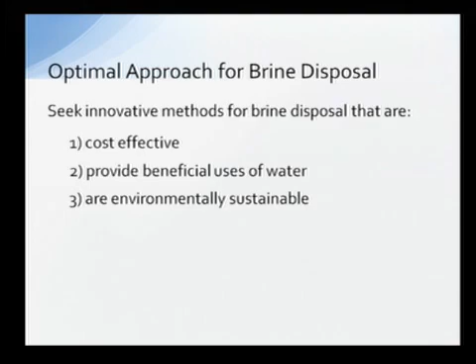So if I were to give a mission statement of brine disposal, if there would be one, we'd look for the optimal approach for disposal. We'd seek innovative methods for this that would be, number 1, cost effective, number 2, provide beneficial uses of water, and 3, environmentally sustainable. So keep that in mind as we go through this presentation. We're trying to achieve these factors.

Here's an aerial shot of the Bullard Water Campus. The current paradigm at the Bullard Water Campus is currently treating about 3.5 million gallons per day of groundwater pumped from the aquifer. The water campus uses reverse osmosis to treat pumped groundwater and produces 0.5 million gallons per day of concentrate, or I'll refer to it as brine. The brine contains high quantities of salts, metals, and nutrients. The brine is currently sent to the 157th Avenue Water Reclamation Facility for blending, where it accounts for about 12% of the capacity of that plant, but accounts for 40% of the salt loading of that facility.

Can I ask a question? Yes, Sherry? Can you explain that to me in English? What does that mean? That last paragraph, what does that mean to a layperson if I'm listening to this?

If you're referring to the capacity, currently we're blending, we're taking the brine and sending it through the sewer collection system to the reclamation plant where we treat our wastewater. So there's a volume of that water going to the plant, and it's consuming volume at that plant. So what we're going to talk about, jumping ahead a bit, is can we get the brine out of the plant. That could free up capacity at the plant, which would treat basically wastewater and not have brine come in there. The 40% salt loading: the RO facility is taking groundwater, and after it goes through the RO process, you're left with this brackish, salt-filled brine solution at a real high concentration. So it's accounting for the salt loading. What's coming in the natural wastewater stream to the reclamation plant has a certain matrix and makeup, and we're loading that real heavy right now with that brine concentration. So removing this from the plant would get the plant back into a more normal operating configuration, and also free up capacity. That's a goal we'll talk about in the presentation. Does that answer your question? Yeah, that helps. Thanks. You bet. Thank you.

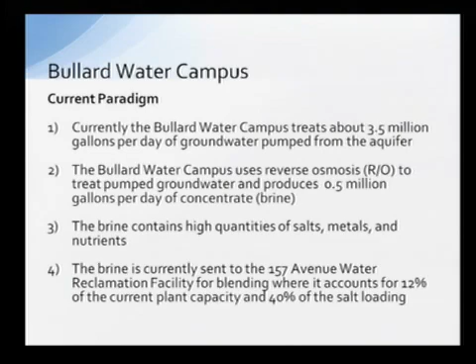So I want to touch on one other thing. The city will be producing brine from the Bullard Water Campus, even though someday we will be taking CAP water directly to the city.

The reason for that is we're still going to have peak summer demands. We're still going to need to pump groundwater and help with peak summer demands as the city continues to grow. In the wintertime, we're going to need to exercise those wells, make sure they're operating correctly in our lowest demand seasonal time of the year. So we're going to exercise those systems.

And of course, the largest component of our portfolio is CAP water. And of course, we're going to potentially have shortages on the Colorado River that could potentially impact us ordering CAP water. So when that occurs, we're going to talk about later on in a Vadose Zone presentation how we can firm those shortages. But that would come through recovery of our long-term storage credits through these wells.

Joe? Mark, I was reading somewhere in a paper on the CAP where they're looking at some potential shortages coming up. How's that going to impact us?

Well, I think we're going to be in a good place. Right now, the CAP has a mixture of priorities within what they're delivering to the CAP canal. The lowest priority water is excess CAP water. There still is a little bit of excess CAP water currently not yet used by subcontractors because they haven't grown into that volume they have acquired.

Next on the lowest priority is agricultural priority water. These account for about somewhere between 500 and 600,000 acre feet per year. And then at the highest priority water is municipal and industrial and, of course, Indian community water.

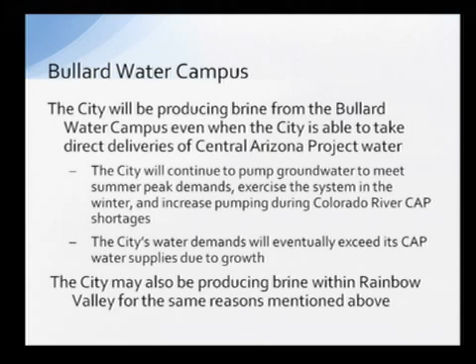Are you talking about our water that we've ordered, that we're on the list for? I mean, we get some of that water that's recharged, correct? We currently order CAP water and have the CAP recharge it for us. What I'm reading is that they could potentially have a shortage, and I'm wondering how that's going to impact what our availability is and what we're guaranteed to buy. What he's saying is, of that water, what are we guaranteed before they start cutting back on it?

Normally, we're going to get an advance warning by the Secretary of Interior. For example, right now we're ordering water before October 1st for 2014. Right now, they're speculating 2016 might be a shortage. We're going to get that firmed up probably around 2015 before we do the order, and we'll know the impacts then. I suspect that we won't have an impact with municipal industrial ordering, but if we would, it means that we would be able to order less water than we currently could out of our portfolio to make that shortfall. We'd have to rely on our long-term storage credits to meet the replenishment obligation of what we're pumping.

Okay, thank you. You bet.

And of course, you probably have heard some of the southern solution aspects. It's hoped that we could take what's learned from this study and extend it down to the south for the southern solution, which we anticipate could be generating brine as well if there's an RO facility due to the high TDS concentrations, the total dissolved solids, including salts and other components in the Rainbow Valley area.

So the Bullard Water Campus Pilot Wetland Project, I just want to show you a couple images here. The upper left-hand corner was when the pilot project first came online. You see in the lower left and upper right, it's reaching full maturity. And then the lower right, another shot there.

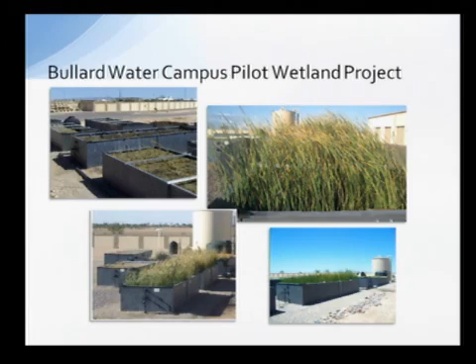So it was a small-scale pilot to see if it worked, to take brine and create a brackish wetland, to see if you could remove specific components from the brine and make the water better quality. We'll touch on that.

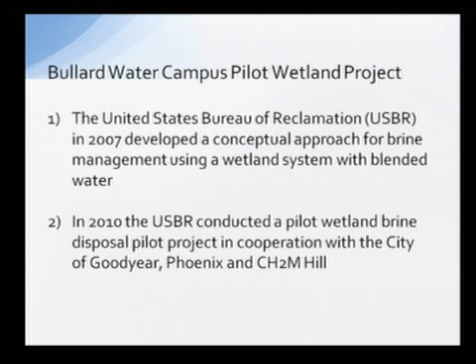In 2007 the United States Bureau of Reclamation developed this concept approach for management of brine using an engineered wetland system for blending water. And in 2010, the Bureau conducted a pilot wetland brine disposal pilot project in cooperation with the City of Goodyear, the City of Phoenix, and CH2M Hill as their engineering firm.

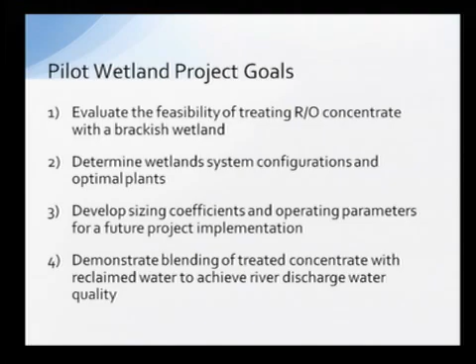The main goals of the wetland pilot study were to evaluate the feasibility of treating RO concentrate with brackish wetland, determine wetland system configuration and optimal plants that would consume as much of the brine components as possible, and also look at developing sizing coefficients and operating parameters for future project implementation at a much larger scale. And then demonstrate blending of treated concentrate with reclaimed water to achieve river discharge, meeting certain water quality parameters. That was actually not completed due to some funding, but we'll talk about a little bit of the blending opportunities that we'll have.

The conclusions of the pilot wetland were as follows. The wetland system was capable of effective treatment of RO brine and removal of metals and nutrients. The plants thrived in the brine, so that was very successful, and the plants grew. They did what they were supposed to do, removing the various components from the brine.

This generated a lot of interest from the Environmental Protection Agency and the Arizona Department of Environmental Quality. They've definitely been part of the stakeholder process—how would they permit these facilities, how effective would they be, and what type of monitoring activities would ensure that any discharges into rivers or waters of the U.S. would meet permitting requirements. So they're very interested in this and seeing the success of this move forward.

Joe? Wetlands, will this generate wildlife? There's a possibility that wildlife could find homes or habitats within these parameters, absolutely.

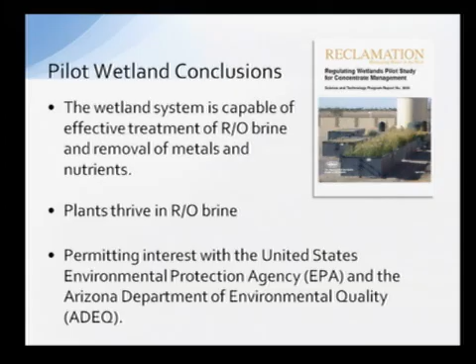My second question is I'm not really sure exactly where that's going to be built. Any problem with the airports? Absolutely—if there are certain requirements, certain buffers around the airport, such as FAA restrictions on open bodies of water and waterfowl and so forth, we'll have to account for that in the feasibility study. We'll take that into consideration. It may not be the most suitable site. There are other potential sites that may be even more suitable just for that very reason, avoiding FAA restrictions. Okay, that's a great question.

Thank you. The birds want some salty grass, that's where they'll be going, right?

They like... So the proposed new feasibility study goals are as follows: to identify potential sites or a site for a demonstration scale brine wetland project.

And of course, ultimately identify the best site. There may be more than one site—it could be a chain of sites. Develop a preliminary design based on that site. Develop a detailed cost estimate. And define the permitting and environmental parameters and requirements. At the end of the day, we want to produce a report that outlines all of these feasibility components.

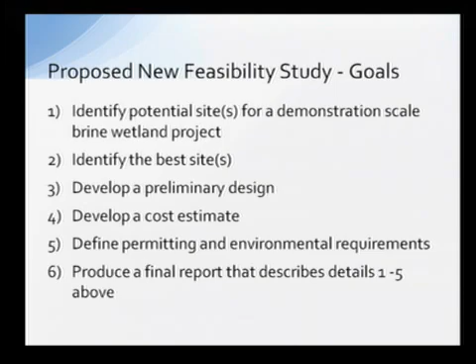So at the end of the day, the goal of this feasibility study is to have a detailed report that we can use as a tool to take the next step, potentially.

I just want to touch on the benefits outlined here to the city. The United States Bureau of Reclamation is a partner. They are contributing $300,000 of in-kind and in-cash, along with their expertise and talents towards this project, and they have quite a team behind them.

Ultimately, and what I think we're all hoping for—I've talked with several folks at the Bureau—the goal of this, if successful, is to solicit funding from the federal government, to seek additional funding from the feds and try to work towards actually constructing this implementation project.

I know it's a lot of information on this slide, but I think it's really worthy of an approach that we're trying to take, going back to that, if you were to have a mission statement, the benefits I see with the city.

In 2010, the Central Arizona Salinity Study Report, referred to as the CASS study, have been doing work on salt in the Phoenix Valley for well over 10 years. They looked at strategic alternatives for brine disposal in the Valley of the Sun, and they identified various types of brine disposal methods and the costs.

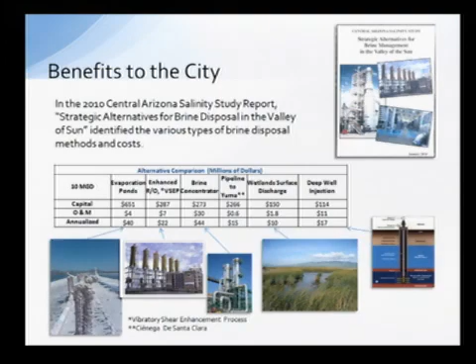So we're trying to look at this as a viable potential solution. It has been identified as the lowest cost annualized. So we're going to look at that as an approach. I included some pictures there. I think the worst is the evaporation ponds. That looks pretty bad. At least it looks natural.

Additional benefits to the city: the city is getting a more comprehensive brine feasibility study than was originally planned in the CIP. The original CIP plan talked about a brine disposal method using deep well injection. So not only would you, and there was a certain dollar amount which we'll touch on a little bit later,

but it looked at a feasibility process that's currently not allowed by state law. So even if it was something to explore, it's still against state law. We'd have to approach statutory changes.

And I'm having discussions with the Department of Environmental Quality. They're very concerned about this because the deep well injection will go into aquifers that they believe someday may be future water supplies. Are we creating an unintended consequence for the future of a future water supply that we may have to embark on using? So they're concerned about that.

The findings from the study may provide real solutions towards brine disposal for the Bullard Water Campus, as we touched on. Again, if successful, it could provide some solutions for that. We've been talking about the Rainbow Valley issues and brine disposal that may occur there as well.

If constructed, these wetlands could promote environmental sustainability. There could be wildlife enhancements. They could sustain or enhance riparian areas. We have a few of those within the city.

The Bullard Wash is one. I think that's being even considered in the parks master planning. They could provide new recreational and educational amenities or enhance current planned recreational or existing areas.

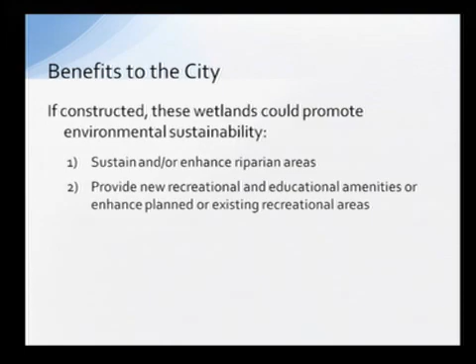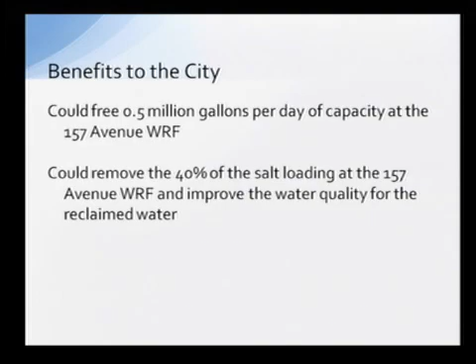And we already touched on this earlier. It could free 0.5 million gallons of capacity at the reclamation facility and remove 40% of the salt loading at the plant. That would actually improve the effluent water quality substantially.

And again, real quickly, U.S. Bureau brings $300,000 in kind and cash. The City of Goodyear would have a 50% match requirement with this feasibility study, which would be money in kind and cash. We propose, in fiscal year 13, the original brine disposal for deep well injection.

So we'll be coming to you tonight in the regular council meeting to talk about reallocation of that funds for this feasibility study. And then the remainder in fiscal year 14-15, as the 168,430, would be an in-kind match.

And we've shared the in-kind cost schedule with the various department heads who would be involved, which is Parks and Rec, engineering, development services, and a few others, and GIS. They are very comfortable with us meeting our in-kind match.

As I just mentioned, tonight's regular council meeting will request to approve a resolution that would approve the city manager to sign, approve, or designate approval of all agreements for this feasibility study. And we request a reallocation of the funds from the original brine feasibility toward this project. With that, I'll happily address any questions.

And I was right on time, 20 minutes. Thank you. Questions? Bill? Mark, are there any other communities that are using—

Sorry, let me go on to Wally for a minute. Take a drink, Bill. And Wally, go ahead, ask your question.

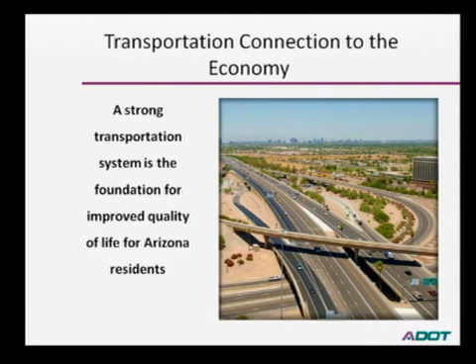Now with the funding situation you're well aware of, we're unfortunately making a shift, and we're going towards more of that 76% in preservation and 23% in expansion. But as you well know, we've seen what we can accomplish when we have funds to build, and what happens to our communities in the good times. So we want to make sure we balance that a little bit.

So we're looking at what we need to do to gear up for the future. You've all heard of I-11, Interstate 11 coming through, and that really is a trade corridor. The current study limits right now are between Las Vegas and Phoenix, but spread into southern Arizona—so we're looking at connections to the four ports along the southern Arizona border.

Right now there are two things I want to point out on that study—two pieces of information on the website, i11study.com. One is a justification report that zeroes in on: do we need this? If we're going to spend significant dollars on this corridor, do we really need it? And obviously we do.

The second is we're going to be working with the Arizona Commerce Authority on a business case analysis. Much like when you entertain a development agreement and ask your developer to provide an impact analysis on the project—is it going to make money if you invest in it?—we're going to do the same for I-11, providing a business case analysis. So when we look to private investors in the future, we'll show them that if you invest in this, there's an opportunity to get a return on your investment. Secondly, there's a passenger rail corridor study connecting the two major cities in Arizona, Phoenix and Tucson.

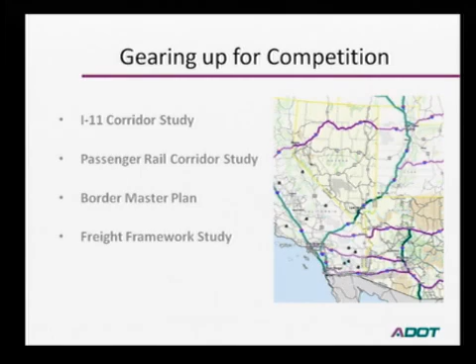We have our system, Service Arizona, that we get our license and things like that from. Well, the same thing - truckers can get their permits online, and if they get their permit and everything's good to go, they just roll right on through. So that's also helped with the wait times.

What we're looking at, again, is making sure that we're capitalizing on the region's assets. We've got a lot of great things in Arizona. We're positioned in between two giants.

There's a lot of money flowing east-west, between California and Texas, and we're poised right in the middle to capture that. Instead of it continuing to go through our state, we're poised to capture it and really position Arizona as the Southwest regional hub. So these are the things that we're working on, that we're looking for your support on.

The Transportation and Trade Corridor Alliance, I'm hoping that you've heard of that. It was commissioned, started by the governor last year, and it's a 25-member steering committee put together by the governor, co-chaired by Director Halikowski of ADOT, Sandra Watson of Commerce Authority, and Arizona-Mexico Commission Director Margie Emmermann. The three state directors, along with former Congressman Jim Kolbe, chair that committee.

They've brought in approximately 25 members from the business community - BNSF, all in the logistics area, BNSF, APL, which is the second largest shipping company in the world, Phoenix Sky Harbor, MAG, PAG are at the table, UPS - basically all of the heavy users out there to help us identify what infrastructure needs are needed to improve the business climate in Arizona and where we need to go in the future.

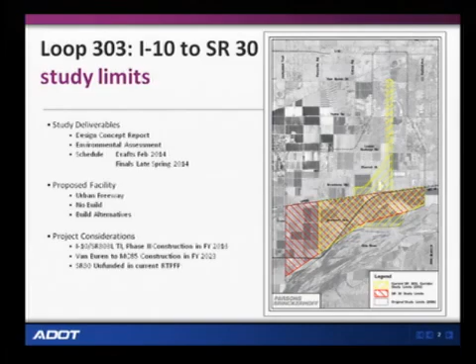All right, so now we'll get into a little bit of the outreach, as Tom went over the schedule. As you know, the study was placed on hold in 2009, and this past year it was reinitiated. Coming up, this fall and winter we'll start doing the outreach. This council update is part of that.

Then we'll get started with public involvement, and one piece of that is sending out a mailer letting all the stakeholders know that the study has been reinitiated, so we're not just jumping into a hearing without them getting any other information.

And then we'll be doing some business outreach, including business forums and business walks. We'll be getting hold of the right contacts, since there are a lot of corporate businesses down here, so that information reaches people who can actually make decisions for that business, not just the staff working there.

We'll also be meeting— I'm going to interrupt you just a moment. Can we publish some of these schedules in Focus?

Absolutely. That's a good idea, since Focus reaches so many people who might not always be looking at the paper, or who throw the postcard away. And Mayor, as the schedule gets more detailed, we can work closely with ADOT to make sure we use all our communication sources as well. Great, thank you.

And then we'll also reach out to Mr. Paxton to make sure we're covering all the businesses he wants, as well as the Southwest Valley Chamber. So we'll be doing a lot of outreach there.

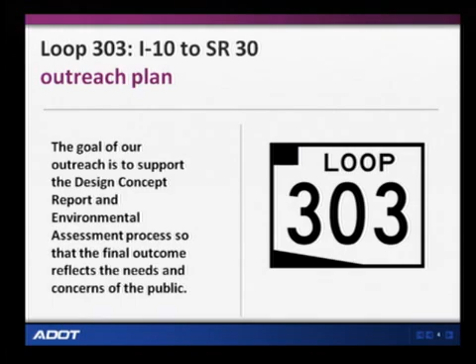So the goal of our outreach is to support the process and make sure the public voice is heard and considered as we reach our final decisions.

So here's a bit more of the plan. We will be doing two mailers, one coming out hopefully end of this month or early October to let people know the study is initiated, and one to announce the hearing as that gets closer. We've already started reaching out to the HOAs to find out when their meetings are.

So that we can let people know how to participate. We can't necessarily go out and present the information that will be at the hearing, but we can tell them how their voice can be heard. Same thing with community events—we'll host a table, if allowed, somewhere in front of the library or other community sectors, to make sure that information is out there.

We will offer two business forums, and we'll also meet with any businesses upon request. If the city wants someone there, we're happy to include that person. We'll have the public hearing next spring, anticipating March. Any questions? No questions?

Thank you so much for having us. I know that even though the public says they're not being informed, I have seen the cards, the advertisements in the paper, and through a lot of media. It's just that some people nowadays are so busy they miss it. If we can figure out how to catch the misses, maybe they'll look at our magazine. But thank you very much.

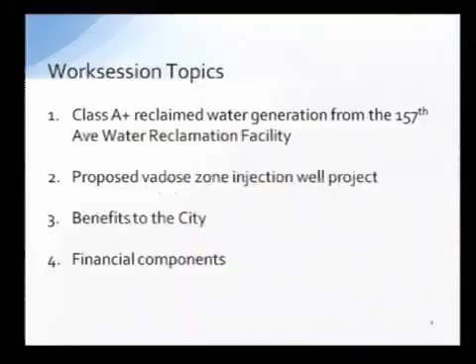There's a shot there of the 157th Avenue Water Reclamation Facility. It currently is delivering 8,700 acre feet of potable water through our entire water distribution system.

And of that, you probably recall from the work session, could you just tell the public how many gallons that is? One acre foot is 325,851 gallons. Thank you, it's a lot of water.

If you recall from the work session last October, approximately 40% of that is collected, what's used in the home or business or commercial enterprise, collected through the sewer collection system, and makes its way to the 157th Avenue Reclamation Facility, then is treated and turned into Class A plus effluent or reclaimed water. Currently today we are generating 3,500 acre feet at the plant, and it has, just to be specific, a current water value of about $600,000.

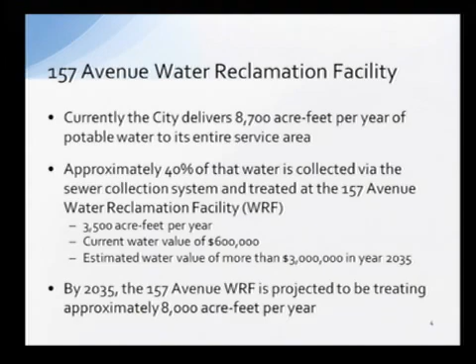Reclaimed water has a parallel track with the value of CAP, Central Arizona Project water, in terms of what it would take to replenish the aquifer if we chose to purchase CAP water versus using reclaimed water that we pump on an annual basis. By the year 2035, it's projected the reclamation plant will be producing a little bit more than 8,000 acre feet per year of reclaimed water. That's based on a trend model.

I want to touch on 3 generalized water reuse methods, the diversity between these 3 methods, and then we'll jump into the specifics of the vadose zone. First is direct deliveries and reuse - this is the famous purple pipe, and I'll be coming back in the near future to talk more about purple pipe within the city.

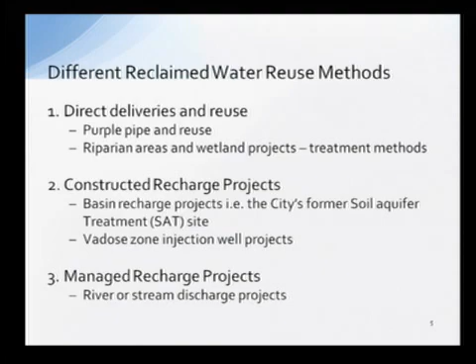The next is constructed recharge projects, similar to what you're familiar with from the city's former SAT site - this would also be classified as the vadose zone underneath a constructed recharge project. Last is a managed recharge project, where you take your reclaimed water and discharge it into a river or wash system, providing whatever beneficial reuse to that river or wash system, but it goes down to someone else - we're going to stop that eventually. I'm going to touch on all 3 of these in more specifics here.

Direct deliveries and reuse: the reclaimed water is directly delivered to the end user. A secondary reclaimed water infrastructure is needed, this is the purple pipe. It needs transmission mains, a delivery distribution system, and storage facilities, so it comes with those expenses. But it provides a single reuse only to those end users, and traditionally it goes to a water-intensive turf facility such as a ball field, and we're currently delivering reclaimed water to the ball fields. It provides 0% reclaimed long-term storage credits. Recall from the last work session, we talked about our long-term storage credit bank account, where if we're able to recharge water and bank that, that's a future water supply we can draw upon when needed.

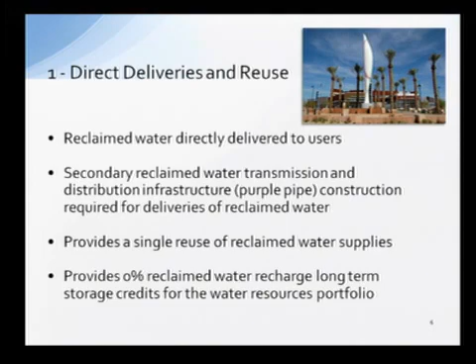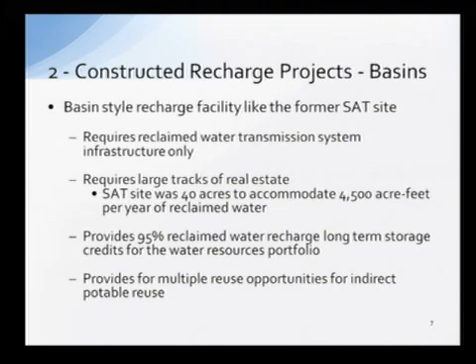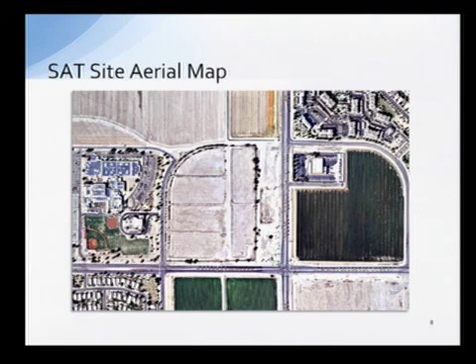We're basically changing groundwater molecules legally into effluent and how we report that, so we're getting more reuses with that water. There's a satellite image showing the SAT site at the corner of Estrella Parkway and Yuma on the northwest corner. There were 6 basins, approximately 40 acres.

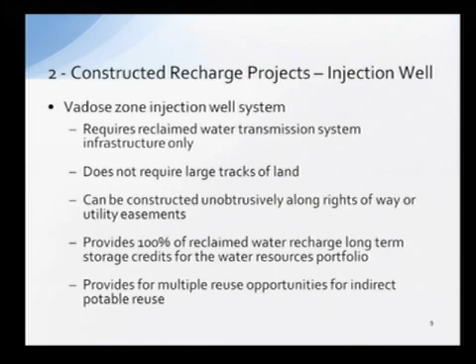The vadose zone injection well system is a constructed project. It requires a reclaimed water transmission system infrastructure only. It does not require large tracts of land, I'll show you that in an upcoming slide, and it can be constructed unobtrusively along rights-of-ways or utility easements. It provides 100% of reclaimed water in a long-term storage credit bank account, and this could then be used for multiple reuses, delivered as potable water as we recover it in our wells.

Joanne asked: so unlike the brine injection, this one's okay with the environment compared to the other one being not, correct?

That's correct. We are producing at the plant the highest Class A+ recognized water quality effluent recognized by the state of Arizona.

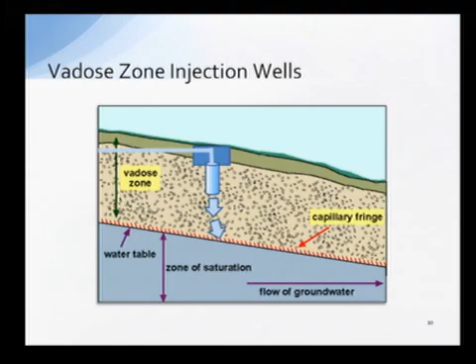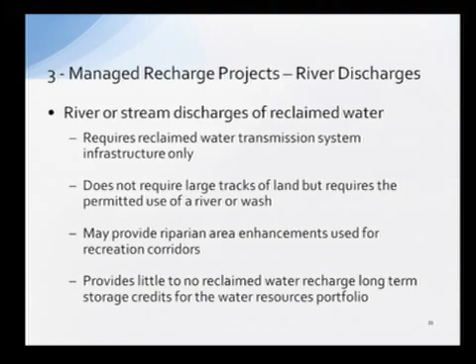Lastly were the managed recharge projects, river discharges into a river or stream. This requires a reclaimed water transmission system only, does not require large tracts of land, but requires permitting to allow you to discharge your reclaimed water into the river wash. It may provide riparian area enhancements used for recreation corridors, but provides little to no reclaimed water long-term storage credits for our water portfolio, as pointed out, Madam Mayor. Somebody else downstream will be able to use that water. I hear that often, I won't tell you what city.

So here's the city's current reclaimed water reuse. The majority of the reclaimed water is directly delivered to Palo Verde Nuclear Power Generating Station via their water transmission system. The reclaimed water is delivered there for direct reuse via an old reclaimed water delivery agreement completed back in the late 80s. The city is not receiving any financial value, and there's no reclaimed value for our long-term storage credit bank account. So they're getting a great asset virtually free of charge.

The only other alternative the city has... Wally, is there any way we can renegotiate this agreement? Yes, I have spoken with APS, one of the owners of the plant, and they are very interested in trying to update that.

We definitely want to have that as a discharge opportunity. Should this project move forward, we want a fallback to discharge our reclaimed water somewhere if we have wells that go down or a similar issue where we can't discharge. It makes sense, and they're interested in updating that and making it more versatile, maybe with value associated with it, while having flexibility at the same time. Right now it's very one-sided - they're getting the value, which is the water. And the only alternative, if APS decided to turn off the pipe for two weeks, the only place we can put our reclaimed water right now is river discharge, and we get no value.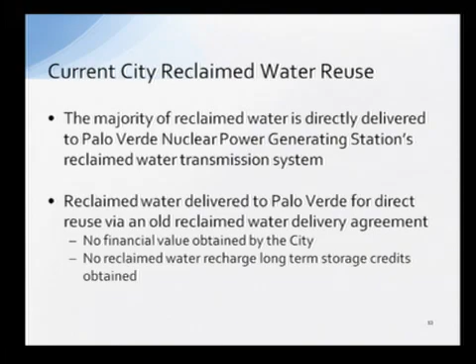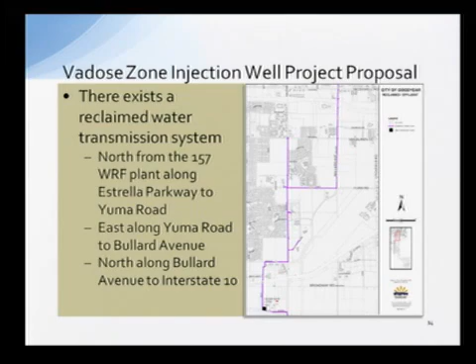Here's that shot of the system. Let's jump into the Vadose zone injection well proposal. There currently exists a reclaimed water transmission system within the city. It starts at the plant, the dark box in the southwest corner of the map - that's the reclamation facility. The red line runs north along that utility easement, then turns right and goes up Estrella Parkway, intersecting and turning at Yuma. Estrella Parkway was the former SAT site in the northwest corner. It goes east along Yuma, then north along Bullard Avenue all the way to I-10. So we already have a reclaimed water transmission system in place.

The project has two phases. Phase one is the hydrologic model. We need to identify Vadose zone injection locations along this reclaimed transmission system. Once we identify proposed sites, we'd like to run 10 and 20-year hydrologic scenarios demonstrating we could safely inject certain volumes of reclaimed water underground as we grow through time, without creating any harm to the land, per the Department of Water Resources, which is the permitting authority.

We will also use this hydrologic model for additional benefits. Since we're already doing a hydrologic model for this, the city has a need to update our designation of assured water supplies before December 31st, 2014. This model can assist with the hydrologic components for that designation. Also, we need 2 of the city's pumping wells to have increased withdrawals, and this model can help with the permitting to increase withdrawals from those 2 city wells. So there's a great economy of scale - we're getting 3 benefits from this one hydrologic model.

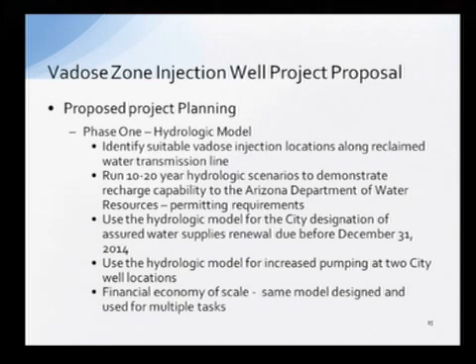The second phase, once we identify these sites, run these scenarios, and it makes sense with the department signing off, is the construction phase. Coming from the reclaimed water transmission line, we'd actually construct the wells and components and start injecting reclaimed water, gaining long-term storage credits.

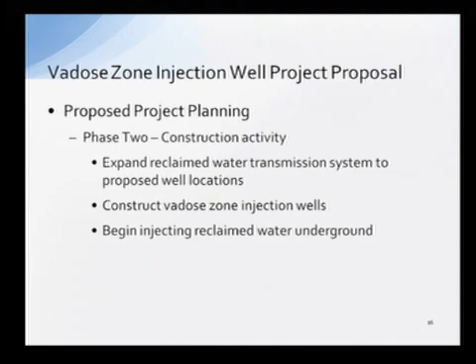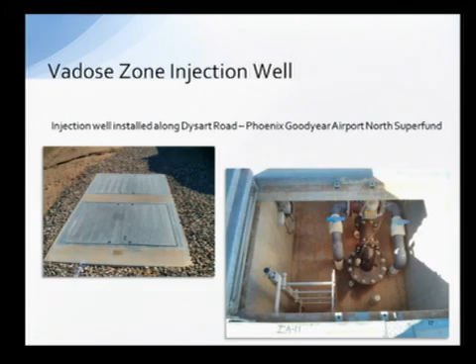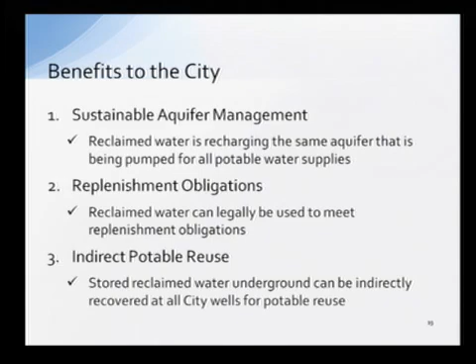So we can touch on the benefits to the city. It creates sustainable aquifer management - the reclaimed water is recharged in the same aquifer from where we're pumping, creating a great balance. There are replenishment obligations - under state law, wherever we pump, we have to replenish, so we're meeting those obligations. There's also indirect potable reuse: if we take this reclaimed water, inject it into the aquifer, and gain long-term storage credits, we can recover it indirectly and serve it as potable water.

Additional benefits: reclaimed water storage underground. It can be stored underground for a very long period of time, so in the future if we have additional shortages, such as with the Colorado River, we could rely on water we've stored underground and recover it to firm up any CAP water shortages, Central Arizona Project water shortages. This helps us become more drought-proof as we grow as a city.

It also potentially improves groundwater quality. As I mentioned, we're producing Class A plus effluent, and as we've talked about before, the groundwater quality has high TDS and other high components in it. So if we're actually injecting better quality water into a region that has worse water quality, we'll be improving the water quality regionally. This is a very good thing.

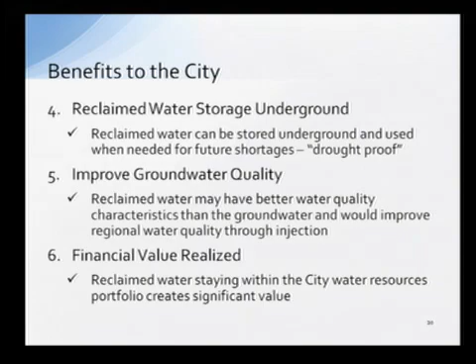And of course there's financial value realized, since we're keeping water in the city. We're really taking advantage of that, as you pointed out, Madam Mayor. I just wanted to show you this, going back to this water value.

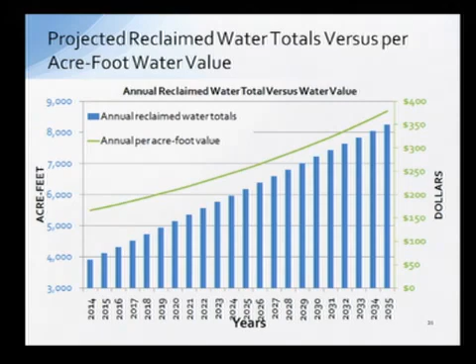You can see that in today's water value, the per acre foot in 2014 is about $160 to $170 an acre foot. By the year 2035, it's going to be approaching $350 an acre foot. So through time, whatever we bank today has more water value in the future. You'll see that comparison. Just wanted to point that out.

At the end of the day, an estimated 133,600 acre feet of reclaimed water could be gained as long-term storage credits between 2014 and 2035. That's a substantial amount of water. Substantial.

Financial capabilities: the fiscal year 14 capital improvement plan carryover. There is $2.4 million carryover funding from projects WR 1001, WR 1202, and WW 1002. These were carryover funds from the CIP described as reclaimed water expansion projects.

In January, we came before you and were authorized to apply for a U.S. Bureau of Reclamation grant. We were one of two entities in the state that received an award for the Water Smart grant. You probably read about that in a council memo. So we anticipate using these funds, $300,000, toward this project.

Also, as I mentioned, we have a need to complete and renew our designation of assured water supplies before 2014. So we have an operational water resources budget set up for the designation of assured water supply, funding part of the modeling and pumping analysis for the two wells. Also in fiscal year 14, the water distribution operations budget has $20,000 for the well pumping analysis. So the grand total of the project is looking at about $2.835 million.